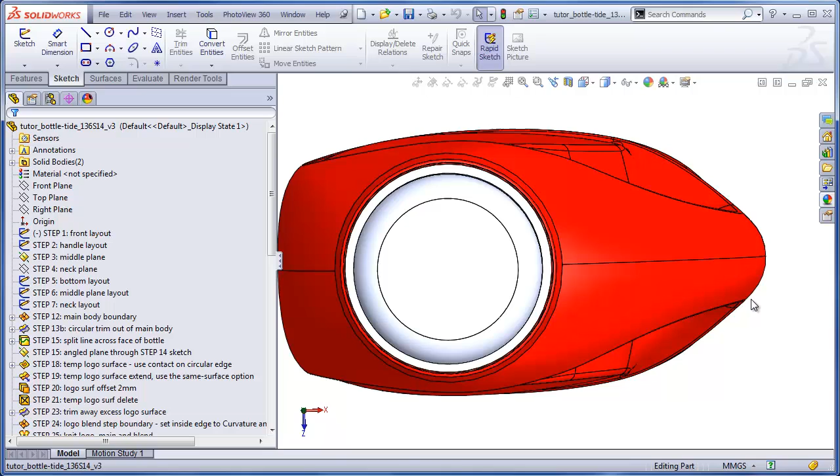Another liberty we will be taking is the shape of the handle when viewed from the top. On the real bottle, the handle is more curved in this area and then flatter in this area and then very curved again. The reason I've taken these liberties is I want to build a single boundary that will give us the overall shape of the bottle. From that boundary, we will be cutting out the circular opening for the label, and we will be building the label surface and all the handle surfaces.

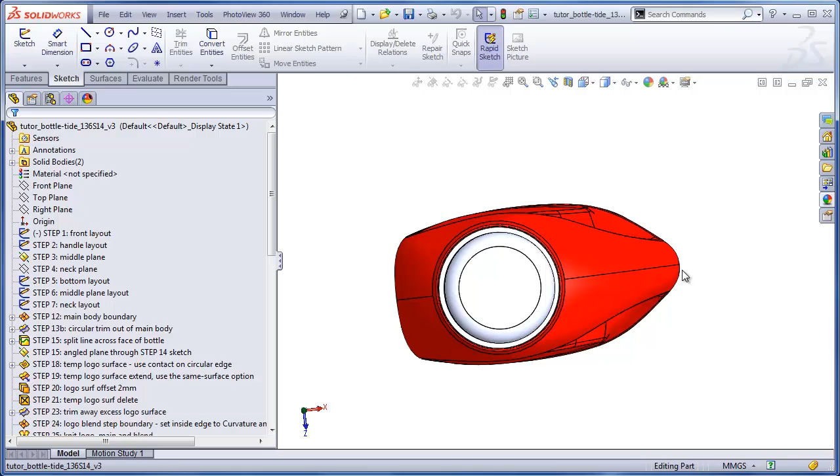If I try to make the shape of the bottle exactly as it is on the real bottle, then in order to make this as a single boundary, this portion of the boundary here would have to be a gentle arc, then it would have to come way out and then back in again and then come into the area of the handle and then come out and then back in again. It would be a very complicated surface that might look good in some areas but probably would not look too good up here or down here. So this is why I'm cheating a little bit in order to simplify the design of this bottle.

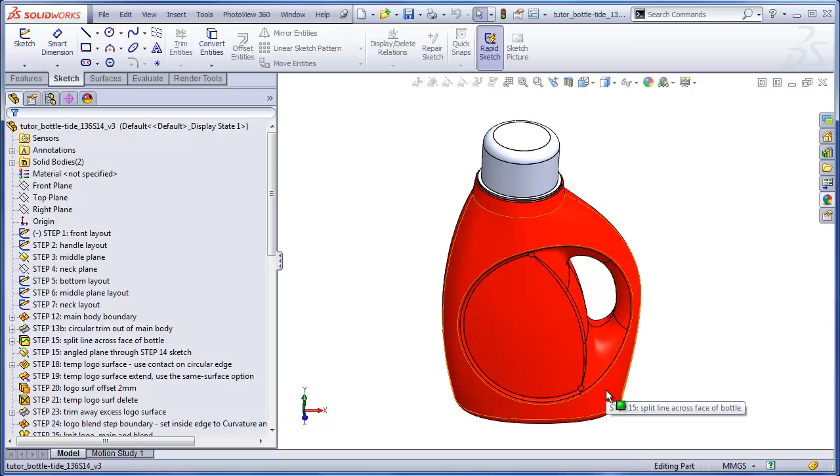If I want to build an exact replica of the Tide bottle, I probably have to split this up into 4 quadrants and build this section, this section, this section, and this section all separately. That will probably take about 20 additional steps in the feature tree. So now I'm going to roll back to step 1 and we'll take a look at all the layouts.

I'm purposely keeping all the dimensions in this front layout hidden because I've asked my students to measure their own bottles and build up the sketches completely on their own rather than giving them a starter file. I will tell you though that the circular cutout here is about 145 millimeters in diameter. The bottle seems to have 2 center lines. One center line is what the base is centered on, and the other center line is what the upper pour spout and neck are centered on.

This circle is centered on the same center line that the base is centered on. The wide point of the bottle goes right through the center of the circle. This arc here is a simple 3-point arc with the widest point right here. This curve here is actually a spline with the widest point here, meaning that the spline control handles are going vertical in this location.

On the real bottle, this point is the same distance from this center line as this point is, but I had to cheat a little bit and move this point out a little bit farther in order to get everything to look right. For this reason, I've dimensioned this point to this center line separately from the dimension of this point to this center line, rather than using a symmetrical relation. All of the details for the cap and this neck are symmetrical about this center line.

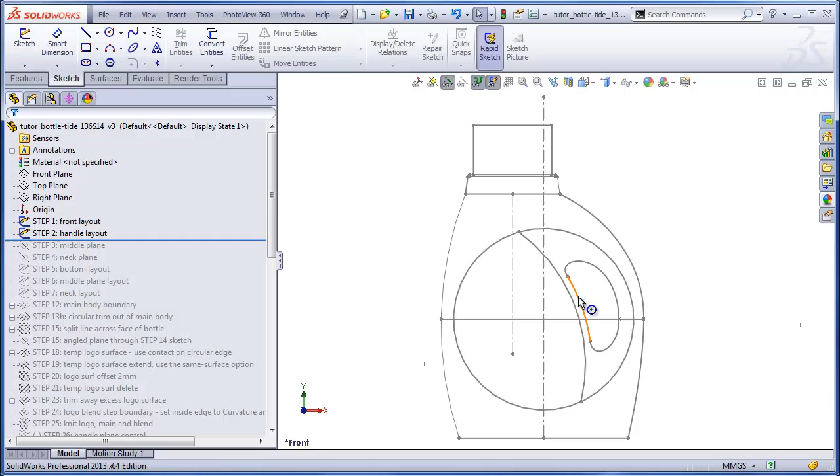Rolling forward to the next layout, I made a separate layout just for the handle details so that the front layout would not get too complicated. This arc is a simple 3-point arc. This portion of the handle opening is just offset from this arc, and this is a 3-point spline curving around and rejoining here.

Rolling forward, I've made a middle plane that is passing through this point in my front layout sketch. Rolling forward again, I've made a plane for the neck, which is passing through this point in my layout sketch.

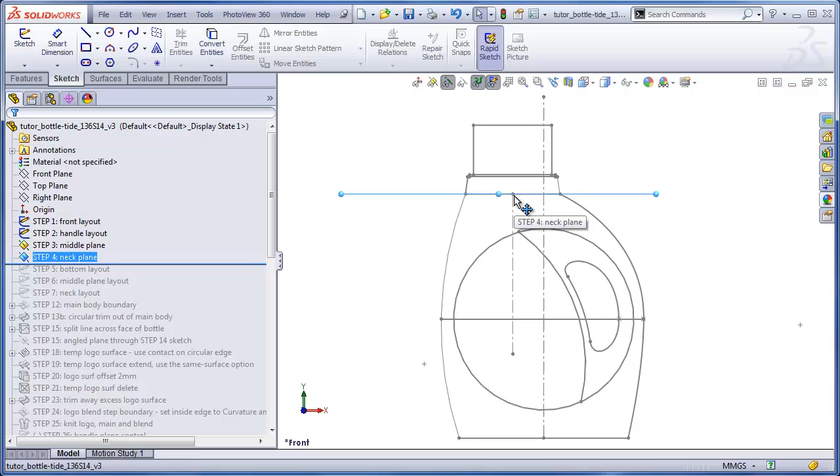Rolling forward again, take a look at the layout at the bottom of the bottle. Let's edit that layout. And this is a simple 3-point spline, 1, 2, 3. This point is aligned with the center line that passes through the circle.

Looking at this from the top view, you see what I've done is added a dimension to these arrows here, and I made a linked dimension so that the length of these arrows is identical. These arrows are going vertical. These arrows at the center of the base are going horizontal.

Another way to do this is just draw a 2-point spline from here to here, put a horizontal relation on the handle, and mirror that over to the other side. Either way will work.

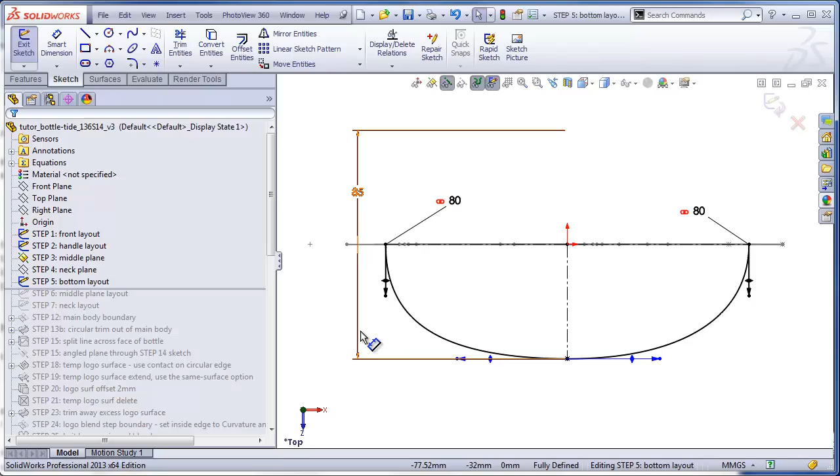I only needed to draw 1/2 of this because we're going to be building only 1/2 the bottle and mirroring it, but you notice I added a dimension going from here to the center line and then doubled the distance off to this direction, which tells us, and here's another hint, that the bottle at the base is about 85 millimeters wide. Let's close that sketch.

Now we're going to look at the layout on the middle plane, and this is going to be the most difficult layout to get correct. We need to get certain corner points of this curve aligned properly so that we have a nicely shaped bottle going through this area and also have a nice looking edge to the circular opening once it's cut out of the boundary. And I'll show you what I mean.

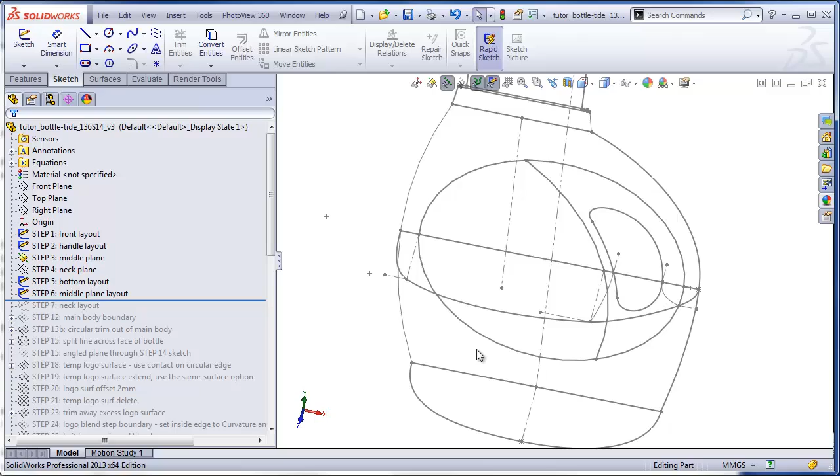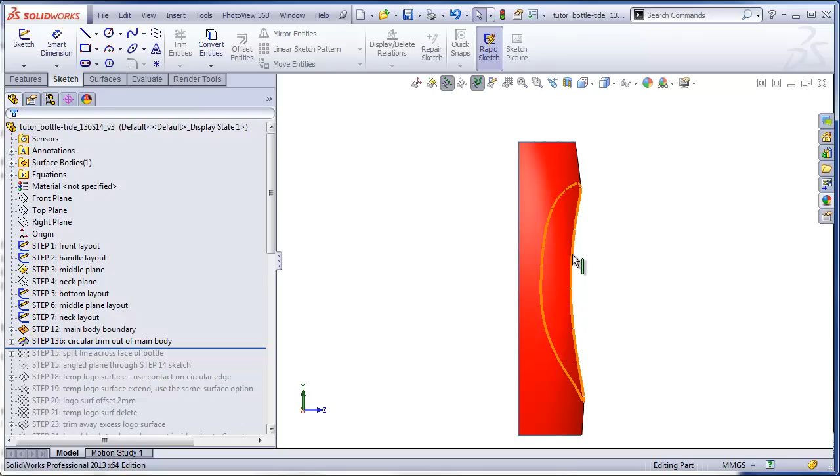I will temporarily roll this forward, and our goal is to make a nice smooth boundary, as we see here, that we are going to cut that circular opening out of for the label area. If we look at it from this view, this of course looks like a perfect circle. And if we look at it from this view, our goal is to have that edge have a nice gentle arc to it when viewed from this left side of the bottle.

Let's take a look at the top view and see what's going on here. We have this surface going largely in a Z direction up in this area, and as we get toward the cutout area, that is going more in an X direction. Our goal is to have a surface which is running more in this direction where the circular trim cuts through.

On the real bottle, this surface here is just a gentle arc which goes along this area here and goes straight to the cutout. So the general direction of the surface in this area is almost going in the Z direction. And that means that the direction of the trim and the direction of the surface are almost the same. So the trim and the surface are meeting at a very shallow angle.

When that happens, small variations in the size of the trim or in the surface can cause large variations in the Z direction of the location of the edge. So if I were to make this circle just a little bit bigger, that edge could move back a dramatic amount. And I will demonstrate that by going to the sketch that's located on this middle plane.

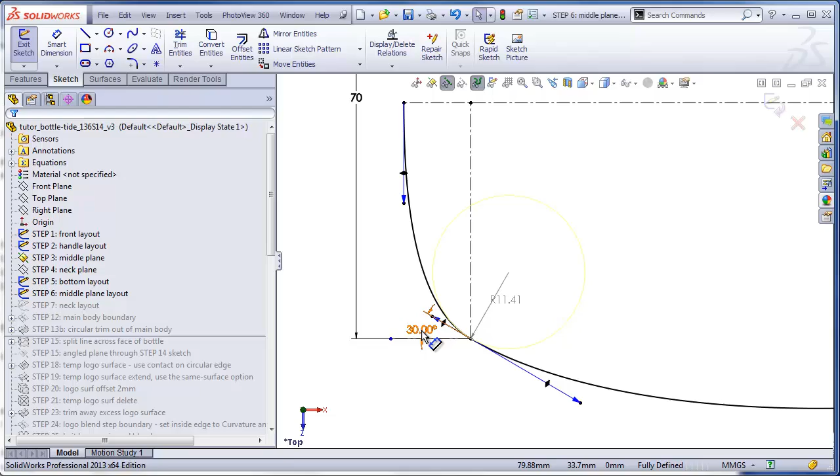So we'll edit that, and here we see this curve is going at about 30 degrees, so it's going more this way than it is that way. So that's good for our purposes. But I'm going to change this to be similar to the real bottle. The real bottle looks more like this, where the surface is going much more in the Z direction than it is in the X direction.

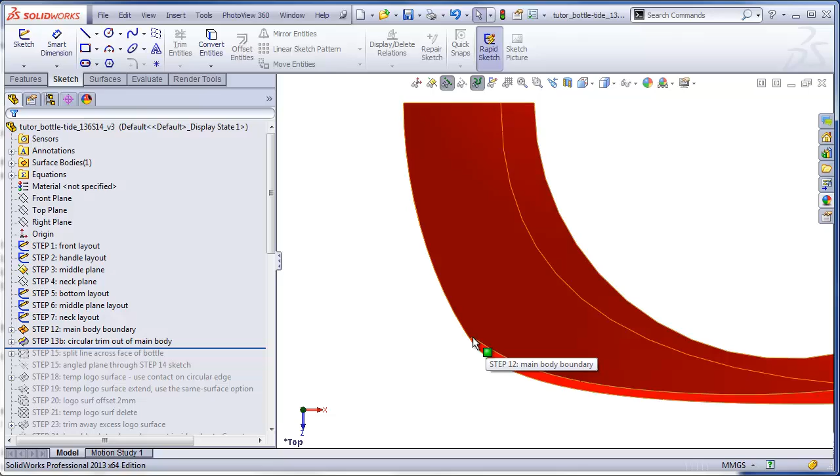We'll finish that. And we have our trim here, which is fine. But if we look at this from the left side again, we see what's happening is that we don't quite have that gentle curve that we had before. It comes down gently and then very rapidly cuts into the bottle.

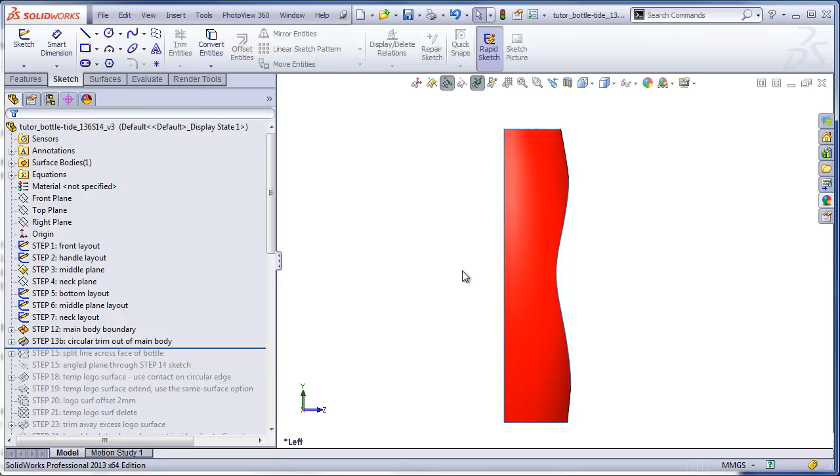This is because small variations in the surface can cause large variations in the location of the trim in this direction. We want to have a situation where small variations this way create small variations this way.

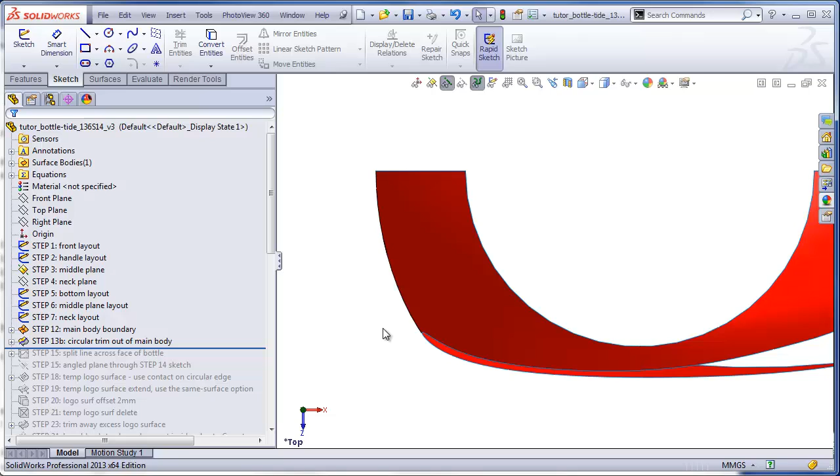Instead, what we have is a situation where small variations this way in this location of the cut or trim create large variations this way, and that's why this curve, when viewed from this direction, doesn't look very pleasing, and it is very unpredictable. So let's roll back and take a look at that sketch.

And in fact, what I'm going to do is completely reconstruct the sketch here in the video rather than just simply show it to you. So we are going to be making our sketch on the middle plane.

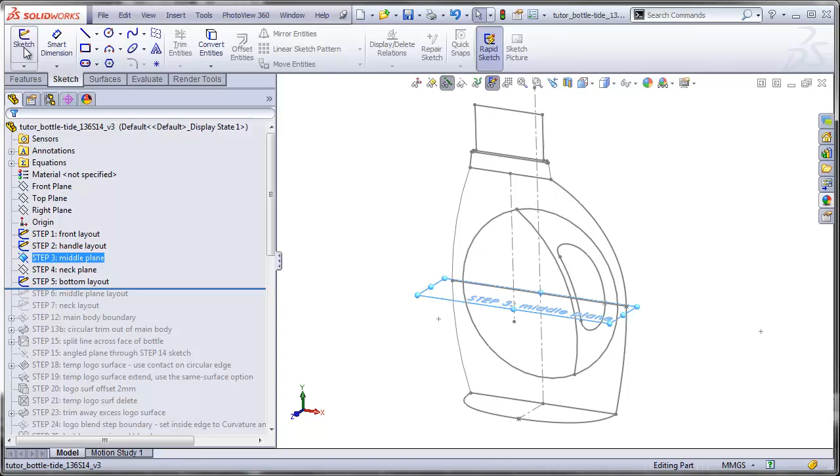And when we make this sketch, we need to align with certain key areas. We need to align with this point, this side of the circular edge, this side of the circular edge, and also where this arc for the label area passes through our sketch plane.

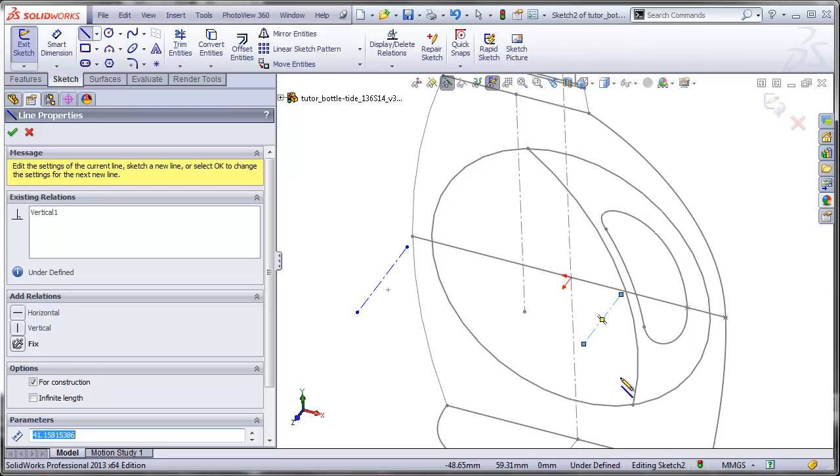So to do this, I'll put in some vertical center lines. Put in one here, one here, and one here. And I'll add some relations. I'll make a pierce to this side of the circular edge here, a pierce to this circular edge here, and a pierce to this side of the circular edge here.

Take a look at this more from the top view. I'll tweak this a little bit so you can see what the front view looks like at the same time. I don't normally like drawing multi-piece splines. I prefer to make one spline going all the way from this end to this end, but I think we might have a little bit better control of the spline if we do it in sections.

So we'll do a section here to the edge of the circular opening, a section here which represents the label zone, a section here which represents the open area of the handle, and then this last portion here which is the outside surface of the handle, which is also part of the main boundary.

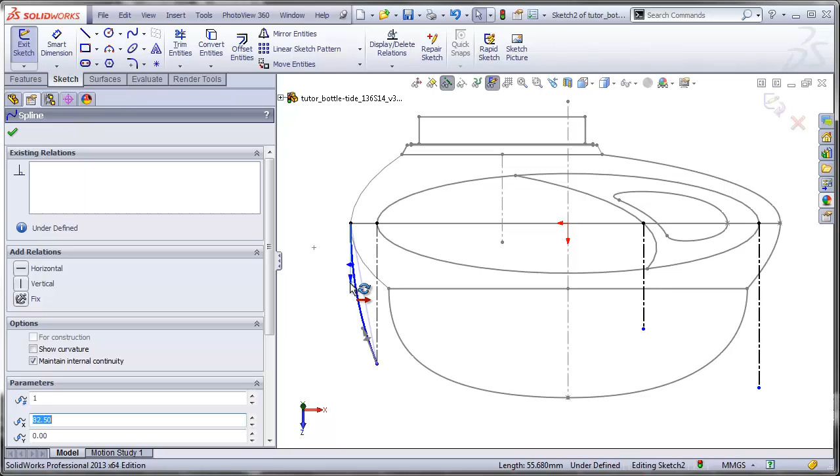So I'll start with a 2-point spline here going from this point to this point. Click on the spline, drag this handle out and make that vertical. And I know that the bottle in this area is about 70 millimeters wide, so I'll make this line 35 millimeters wide.

And what I want to do is make sure that the surface right where it intersects with the circular opening is going more this way than it is going this way. So if I drag out my handle here, I want to make sure that the angle between this vertical is more than 45 degrees. If it's 90 degrees, it means the surface is going completely this way at this point, which is not going to be practical.

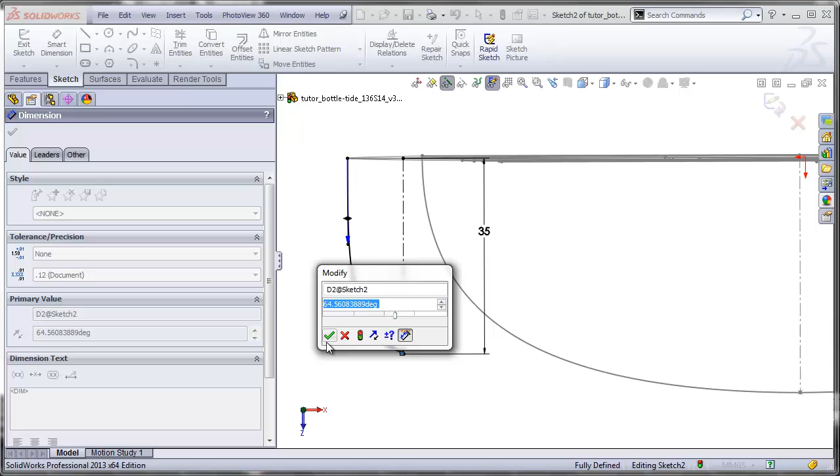So I'll drag this back a little bit, add a dimension, and I'll make that about 60 degrees. You might find yourself tweaking this later on when you make your boundary. And I'll drag this handle back a little bit to give this a more gentle sort of arc. So right at this point, this surface is going this way.

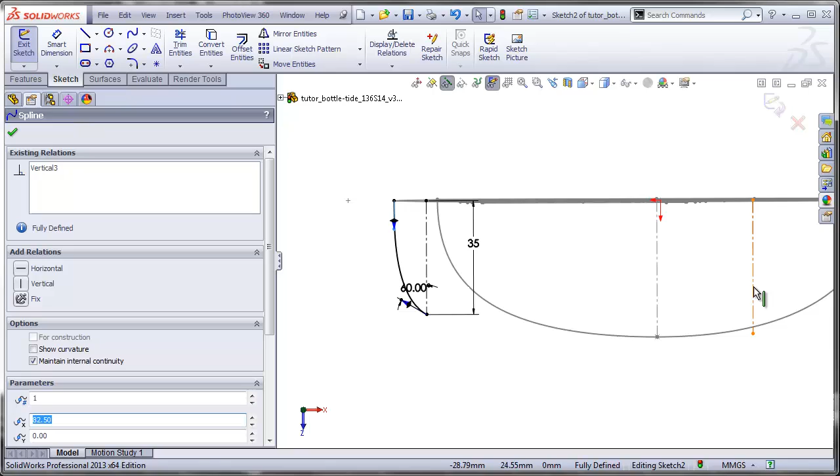Zooming out a little bit, we will be drawing the label zone here. It's about 40 millimeters to the center line of the bottle here. So I'll just put in 40 there. And draw another 2-point spline. I'll eventually make this tangent to this here, but I'll leave that alone for now.

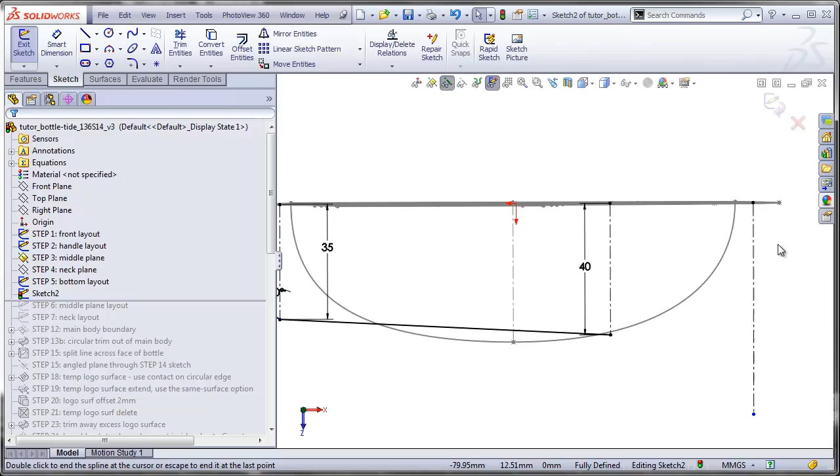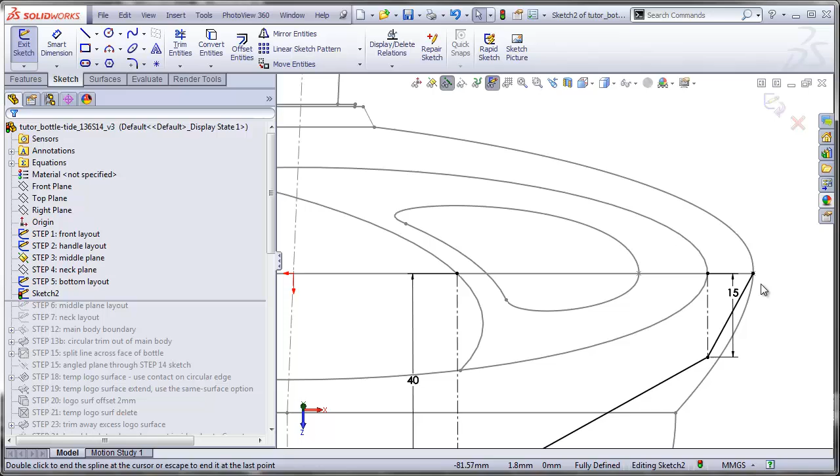This area back here is where the handle is going to be. The handle is between 20 and 30 millimeters wide in this area, so half of that is 10 to 15 millimeters. So I'll just make this about 15. And I'll draw another 2-point spline going from here to here. And finally, the last piece is going to go from here to this point here. Tweak this spline here and drag out this handle and make that vertical.

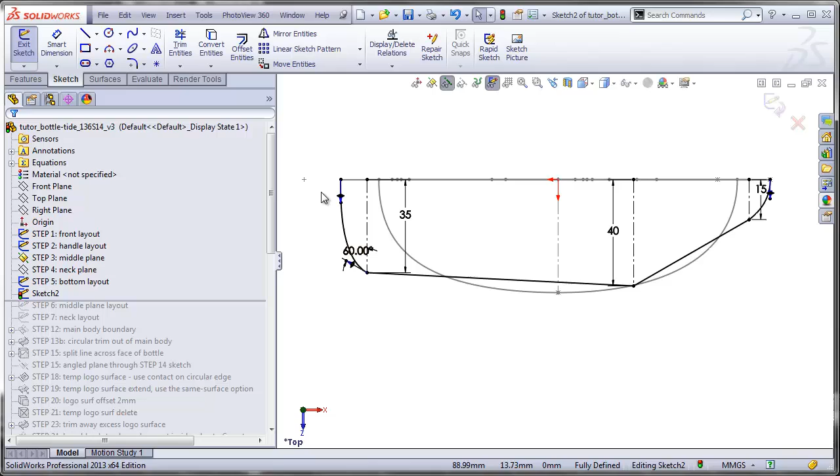And let's look at this straight from the top. We need this to be in one nice, smooth, continuous shape. And we don't want any lumps or any reverse directions. We want it all kind of cupping upward. So we'll start out making this tangent to this and drag that back a little bit.

Then we'll make this tangent to this and fiddle with our handles a little bit. And the last thing is to make this tangent to this. Now we can add some more dimensions to help us control the angles of these handles.

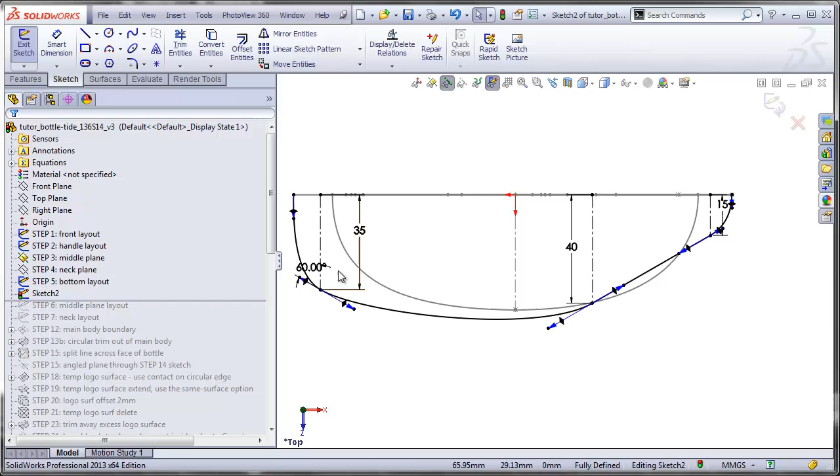When you piece together 2 splines and make them tangent, for whatever reason you can't drag the handles anymore, but you can add a dimension to them to change the orientation of the handles. These handles are already locked at the 60 degrees. So we'll zoom in here and add a dimension from here to this handle.

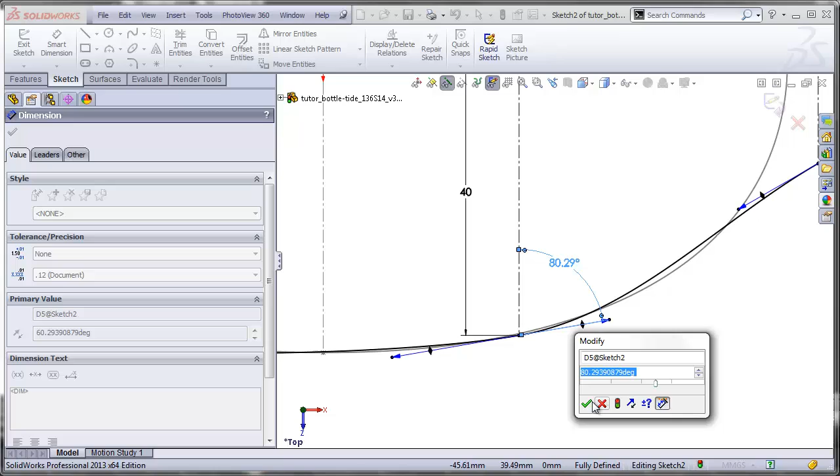I'm going to flatten this out by increasing this angle. So about 80 degrees should be good. Let's make that an even number. I'll make that about 78.

And over at this end, I have another situation here where I want the handle to be as rounded as I possibly can. So I want the surface of the handle right at this point to be going a little bit more this way than it is that way. Meaning that this dimension here should be more than 45. I don't want to go too much more, because what it does is it forces this curve to go backwards before curving back out again. So I'll make that 45 to start with, and I'll see if I can increase that angle just a little bit.

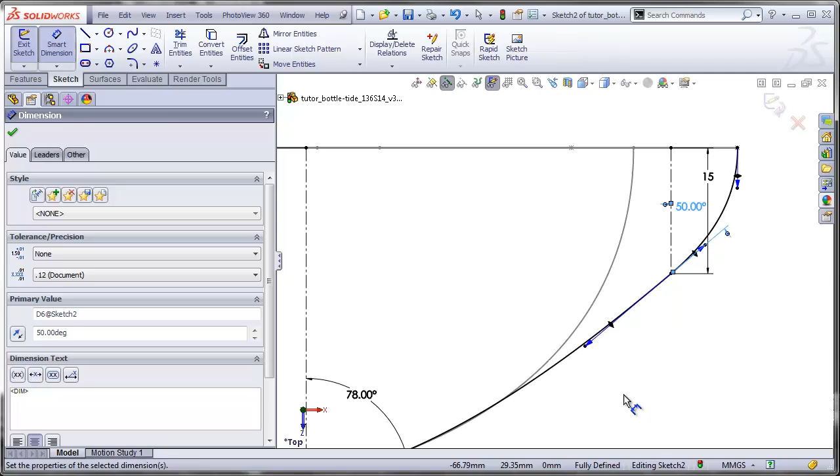So that looks pretty good. Then I can always play around with these handles a little bit to get this looking a little more smooth. And if I'm really brave, I can now try adding some equal curvature controls between here and here, here and here, and then finally from here to here. It's possible that I'll get some errors when that happens.

The other thing I want to do is make sure that in this area where I'm going to be cutting out my label, that I have a nice generous radius here, because this is going to be blending with the boundary up in the neck area, and we don't want to have any kind of a pinch or crease that's going to go all the way from this middle plane up into the top area of our boundary. We want this radius here to just slowly get bigger and bigger until it flattens out in this area here.

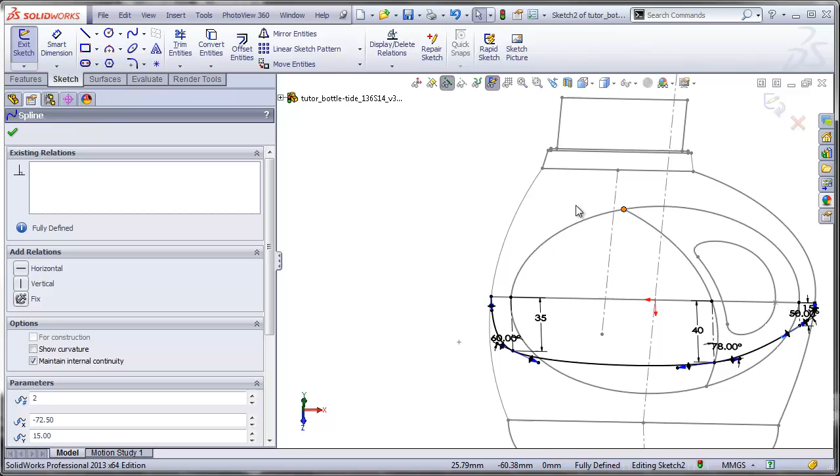So what we can do, right click on this spline and go down to Show Minimum Radius. That shows us the radius of the spline at its minimum radius point, which just happens to be in this area. You see, if I fiddle around with these controls, dragging this handle here actually increases the radius here. So that's good. So it's very flat here, and then it gently arcs into this spot here.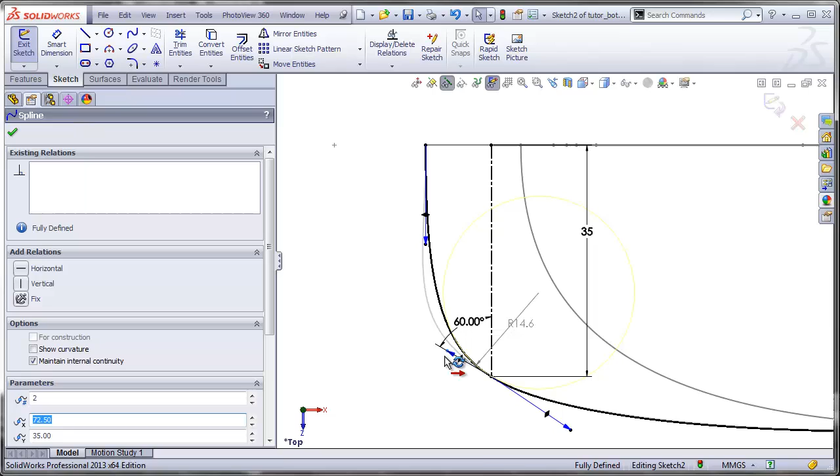Or if I fiddle around with this handle here, you see what happens is this starts going backwards. That's bad, so I have to come back around here again and make that a little smaller. And I should be able to get a radius in this area that's somewhere between 10 and 15 millimeters. That will give me a nice smooth surface in this area that will look nice as it transitions up to here. Closing that sketch.

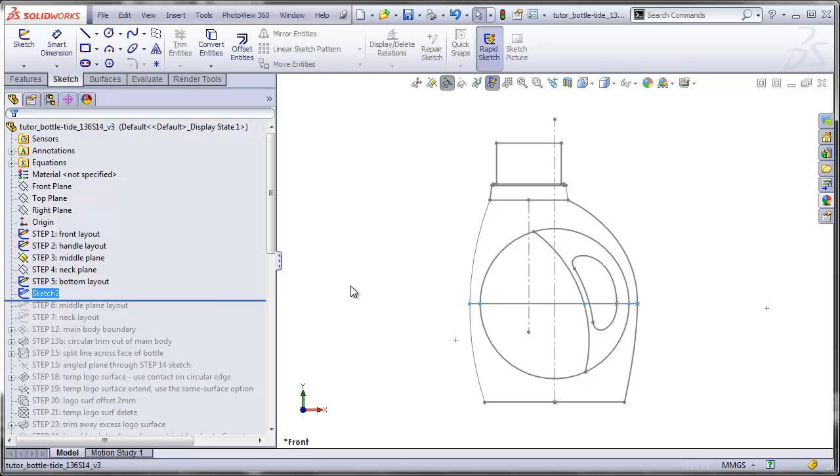I'm going to delete that sketch because I already have made this once before. Rolling forward, this is the actual sketch that's in my model here. And there's one last thing that I did put into the sketch, which was a simple circular arc here that goes from this point, which is aligned with my circular opening, and is going to this point in the opening for the handle. And I've got a vertical construction line that this arc is tangent to.

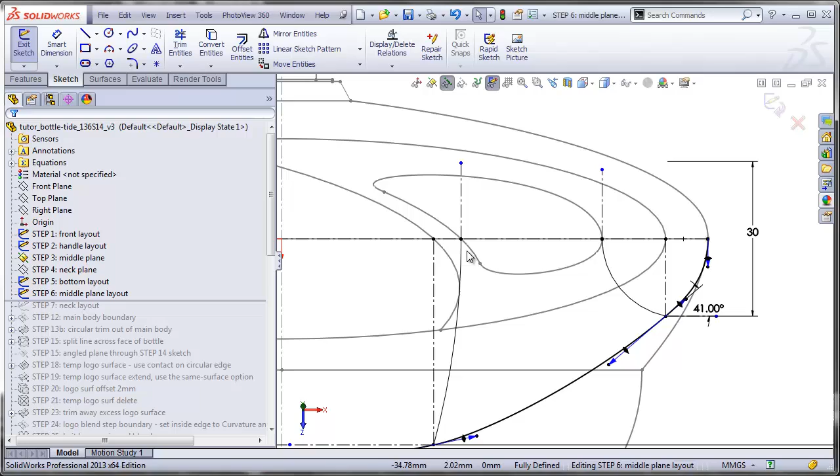So my handle is going to have this edge here for the inside surface and this side here for the outside surface. Over here I've put another arc. This end is aligned with my construction line here, so that brings it in alignment with this point on my circular arc. And I've made a pierce between this arc and this arc passing through my sketch plane. And again, I've made a vertical construction line and made this arc tangent to it. So this is going to be that surface where my main label surface ends, and it transitions to the opening for the handle.

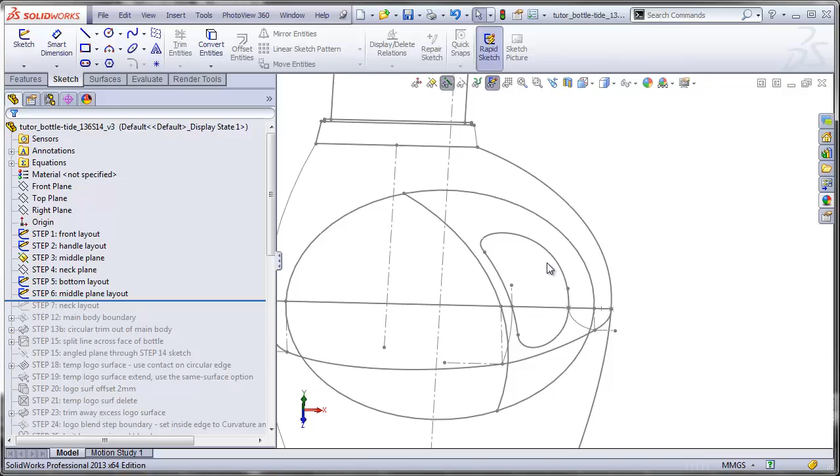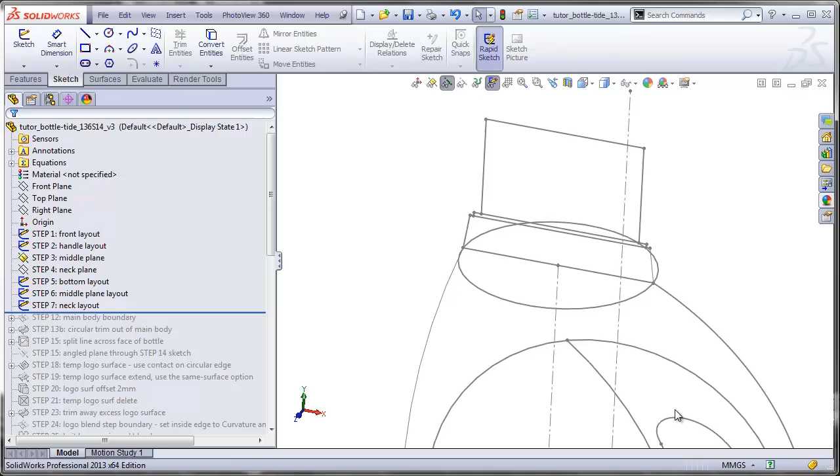The very last thing is on my neck plane. I'll roll this forward. I have a very simple sketch that is nothing more than a circle with its center on this center line here, and one of the points coincident to either here or to here. That finishes all of my layout sketches. The remaining steps, even though there are quite a few, actually shouldn't be too difficult for this project. So concentrate on getting all of this just right before moving forward with the rest of the model. That concludes this video.